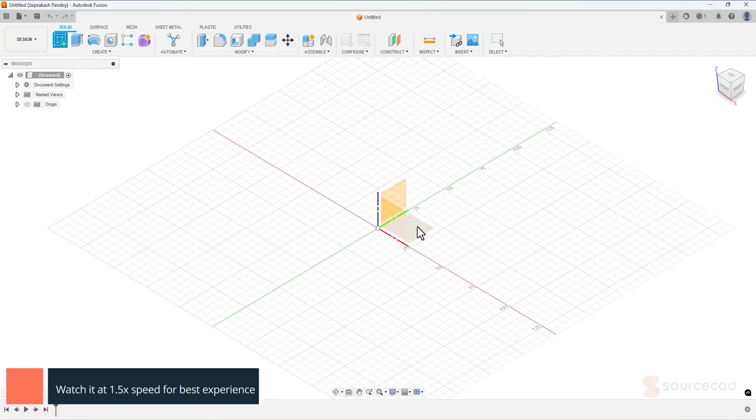Alright, so let's start with the sketch tool. I'm going to start with the top plate on which the holder fixture will rest. So here I have the first circle and the second one.

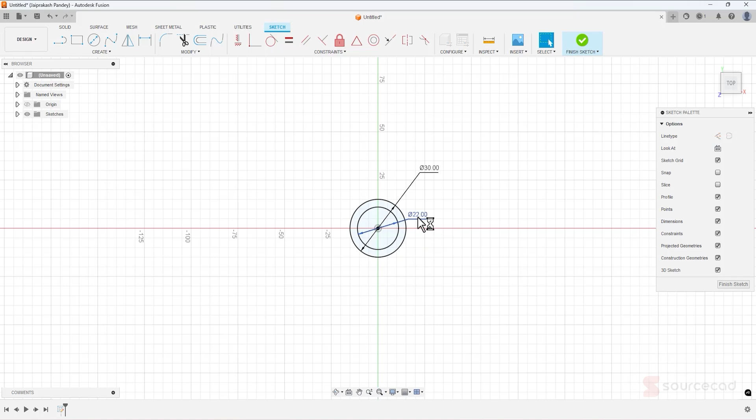Now add the dimension. I'll type D, and here I'll add the dimension of 30, and this one is 22, since we are adding it on the same sketch. So 22 and 30. Now let's extrude this: finish sketch, click on extrude, add this area here, and the distance should be 2 mm. Press enter and we have that plate.

Let's go to sketch again, and this time I'll select the front plane. Or maybe the right plane - so right plane, and now I'll go to spline and we'll add the spline.

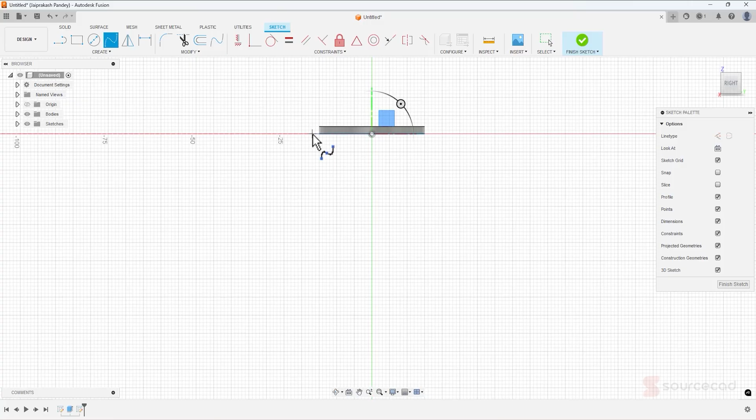I'll start randomly here. I'm not going to be very precise here, but we will constrain it later using dimensions. For now, let's generate the outline of this lamp - a general outline, and I'm going to use at least 4 control points just to ensure the shape can be modified properly afterwards.

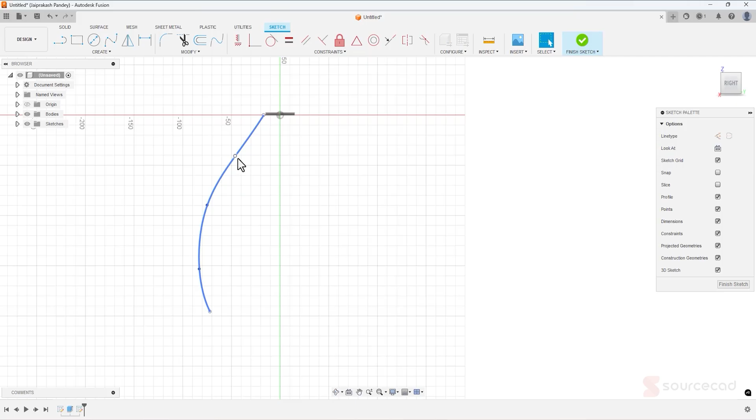So with that completely set, let's just move it slightly here like this. Okay, and this looks about right. All right, here we are - that's the general outline of our lamp.

Now we can constrain this point. So let's type D. From this point to this, I'm going to add the distance of 15, because the entire diameter was 30, so obviously this should be 15.

Now let's go to offset, and I'll offset this spline in this direction. I don't want to make it very thick because we want the light to pass through this material, so we'll just ensure the diameter is just 1 mm, and I'll add the negative side just to ensure it's made on this side of the drawing.

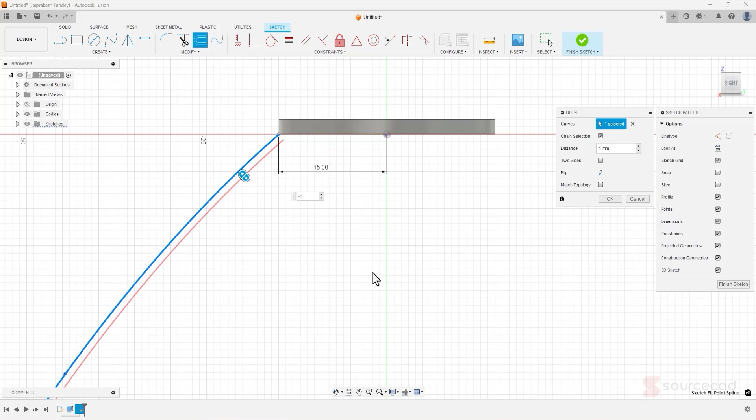Now we need to merge it here, and as this is an offset, we cannot just use it directly. So rather than using it directly, I can use line or maybe spline - I'll just use line to keep the shape simple. So here, and then I'll just connect it with this. Okay, there we are - now this is completely closed, and I'm going to do the same thing for the other side here.

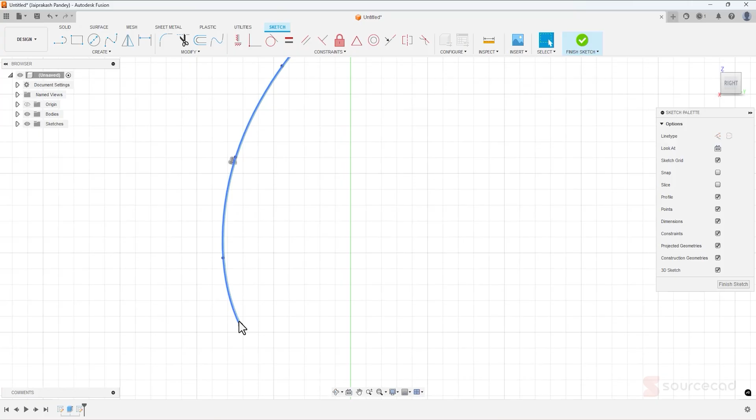So I'll select line and I'll just make it like this here. So this is also done. Now we have a completely closed shape.

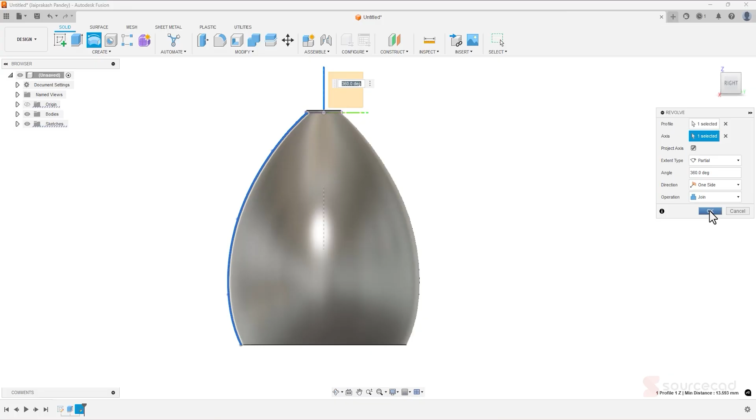We can revolve it, so let's try that. Finish the sketch, go to revolve - the shape is already selected. For the axis, I'll select this axis right here. And here's the shape - select join just to join the top plate with this part, and click OK. And we have this first outline generated properly.

Now before we add details, I do want to ensure that this part remains sturdy enough to hold the entire weight of this lamp, and to do that, maybe I'll just add fillets here. As you can see, this is exactly at the corner, which is not the best place to be, so let's just make a slight modification here.

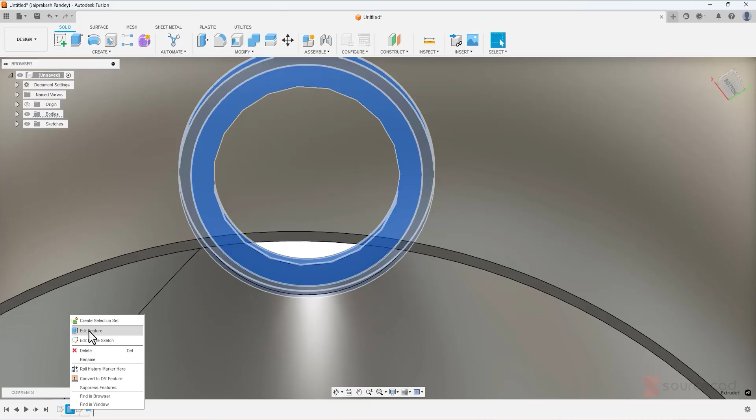I'll go to the original extrude feature and edit this. Rather than adding 2 mm, I'll add minus 2 mm distance - this is going to only reverse the direction. And with that, we now have this shape which is completely merging here.

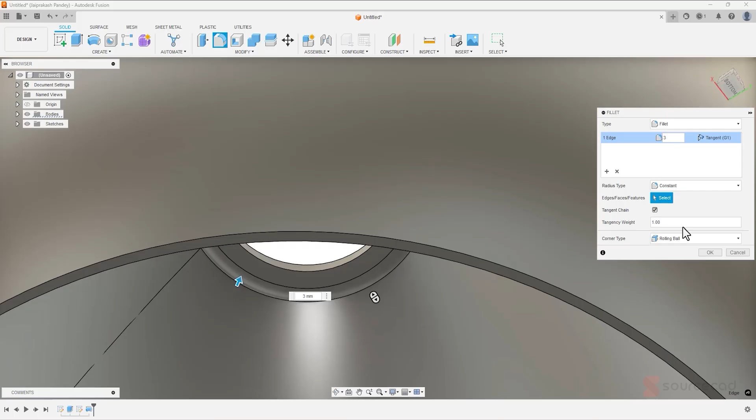Now we don't have that gap, we can add a fillet. So let's go to fillet and add this one, and let's try a fillet of, I guess, 3 or 4 mm is just about right - let's type maybe 3 mm. Just click OK, and we have it added. Now if I orbit this, it looks perfect. Okay, so we have that shape done.

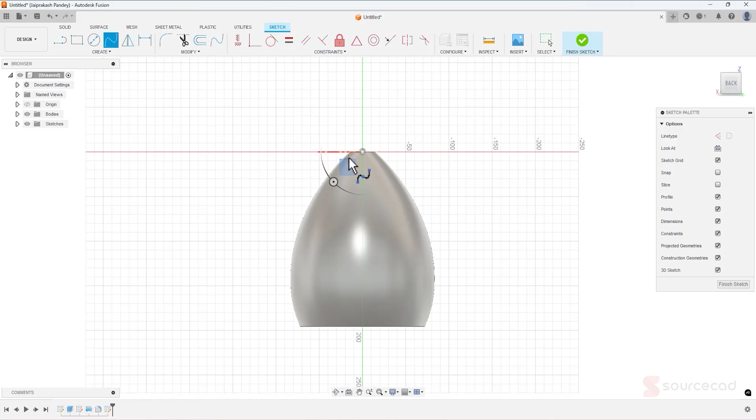Let's add the design features at the top. So let's select back, sketch, here's the plane, and we are ready to add the design features. Once again, spline is the tool we'll use for this - I'll go to spline and let's start about here.

Okay, that's about right. And here I'll just move it up a little, and down here and here, and finally somewhere around here it should finish. Just click OK and we are done.

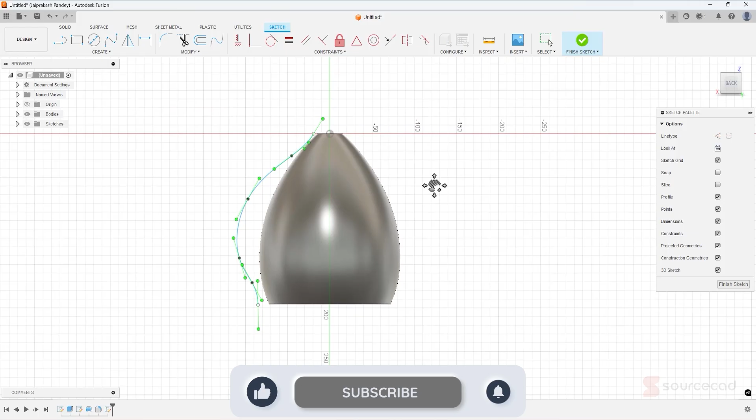Okay, let's modify its shape as well. Now based on the shape, the light will pass through this lamp - so the higher the density, the smaller will be the intensity of the light.

So here, maybe rather than doing it like this, I'll just ensure that it is added like this. So at this area where we have this higher density, less light will pass through, and then here more light will pass. Okay, so once again, just a general shape, and now let's trace this as well, this outline.

To do that, I'll go to create, project, and project this shape here. All right, click OK and we are done. Now to extract this edge, I'll go to create, project include, and I'll select this spun profile. That's going to extract the profile of this lamp.

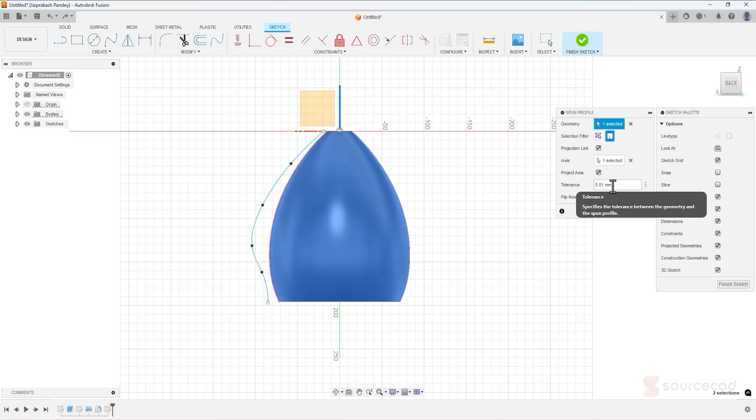So select the lamp, and here in the axis, I'll just select this axis right about here. Add a little bit of tolerance. In this case, I'm just using the default tolerance value, and click OK. And here it is. The profile is extracted.

So with that, let's now constrain it. So I'll just move it like this, add a line connecting this with this, and I'll make sure that this line is horizontal. Okay, done. What next? Well, we just need to do the same thing about here. So let's go to line, select this and this. All right, so we are done. This is already horizontal, so we don't need to make any modification here.

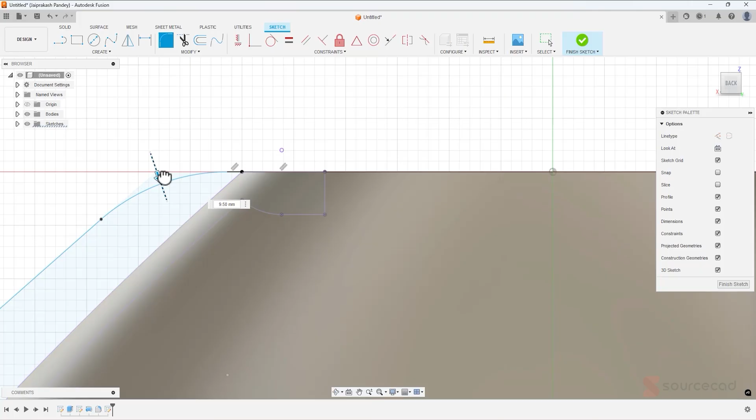The only thing that you may want to do is add a little bit of fillet just to make sure that this remains smooth. We can do it right about here. So I'll go to fillet, select this edge, move it inside, and this seems just good enough. So I'll press enter, and yeah, there we are.

Now if you want to add a fillet maybe on this side, that's also fine, but I'll leave it like this. Or maybe add a fillet here for a very small edge. Yeah, that just looks about good. So yeah, that's good. Okay, so that's done.

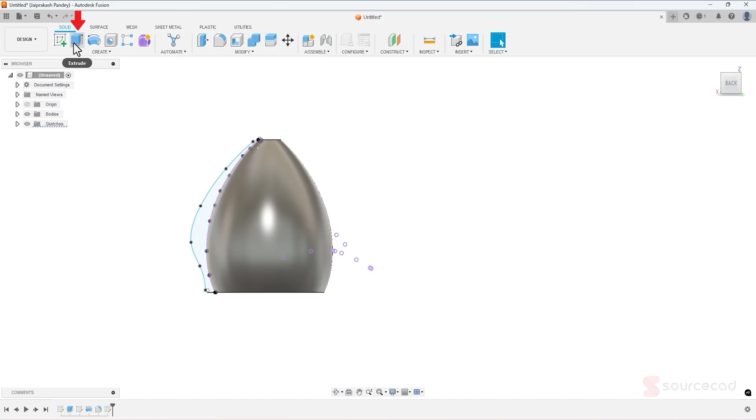Now finish the sketch and extrude this feature. So I'll just select this, and the extruded length is 1 unit. Now the current feature selected is cut. I'll just make sure that this is new body because we want to make multiple copies of this new body. So well, that's how it should be. And in fact, you know what, it should be 2 mm. So 2 and click OK, and we have this shape here.

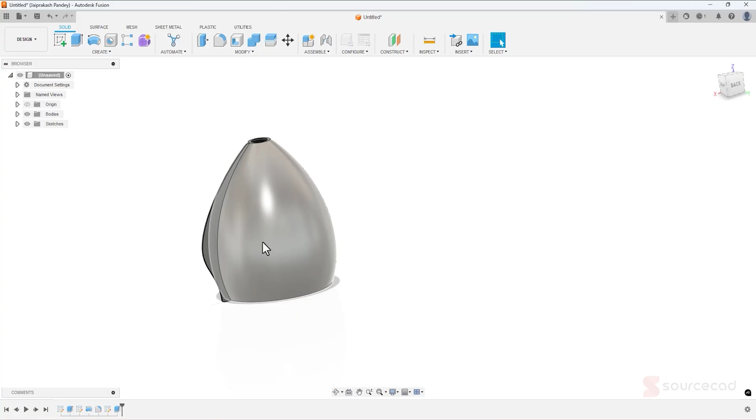Now we need to make multiple patterns of this. To make the pattern, go to create, pattern, and circular pattern. Now select this fin, select the axis, and select this axis right about here. And here it is. Now by default it's adding 32 objects, but I think we can do it better. Maybe add 48 just to add more density to this, and click OK.

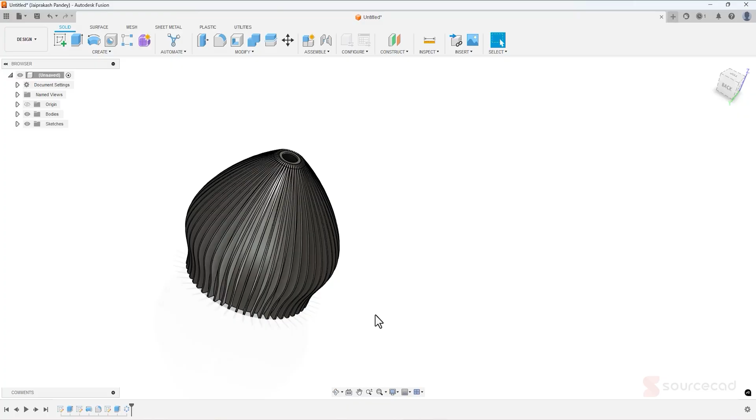And here we are. Here is the general outline complete. So that's the interior, and these are the fins that we've added. Now the lamp is ready, and we can directly go and just 3D print it. But if you want to add more features, you're welcome to do that as well. In this case, I'll just save it first, and I'll call it lamp.

All right. And now let's go to utilities and see how much material it's going to consume and how long it's going to take to 3D print this. Now in this manufacturing section, we have a problem. Well, if I select print utility, and if I select an object, you'll notice that everything is separate. So we just need to combine it all into one before we can actually send it to our 3D printer.

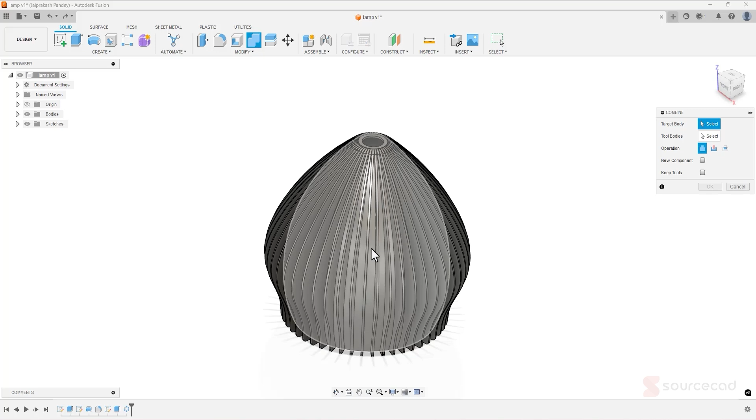So let's cancel it out, and I'll go to solid, and I'll select this combine feature. Now I'll start with the base shape, which is this lamp. And then for the tool bodies, I'll expand this body section, and I'll select these entire set of bodies, and we have a problem. So seemingly the problem is showing up because there are some gaps in our model. So let's just cancel it and just figure out where the gaps are.

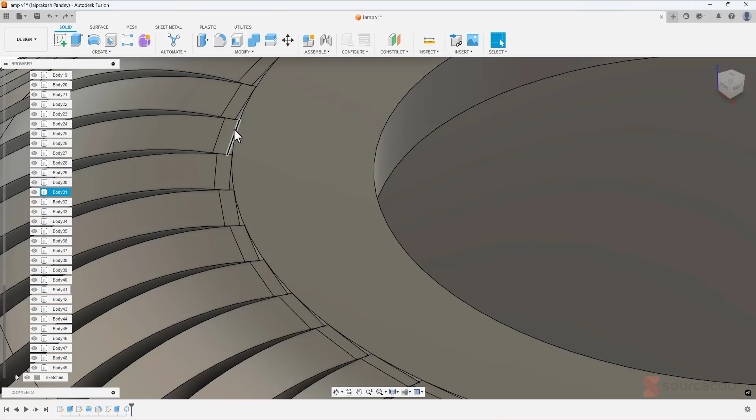And as you can see, yes, we do have gaps. So these features are not exactly overlapping here, and they're also overlapping with one another. So rather than using 48, maybe I'll use a slightly smaller number here. So I'll go to this feature and edit circular pattern, and rather than using 48, I'll use 42 features. So this overlap problem is fixed, but still we have a gap here.

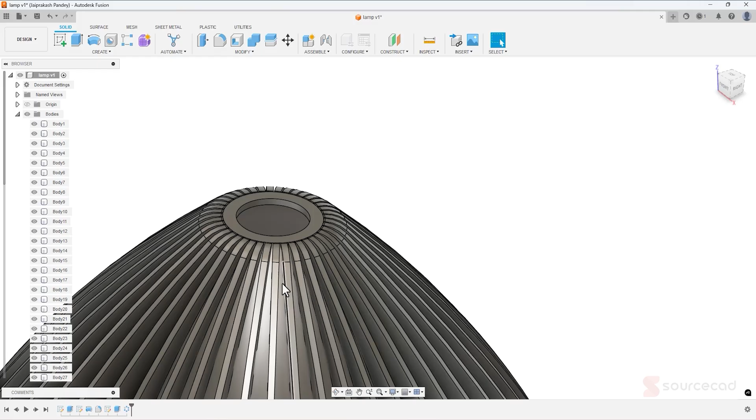Now to fix this gap, I'm going to offset the face. So I'll just make it more thick, this lamp face. So go to modify and select offset face. Now the face that we are going to offset is this lamp right about here.

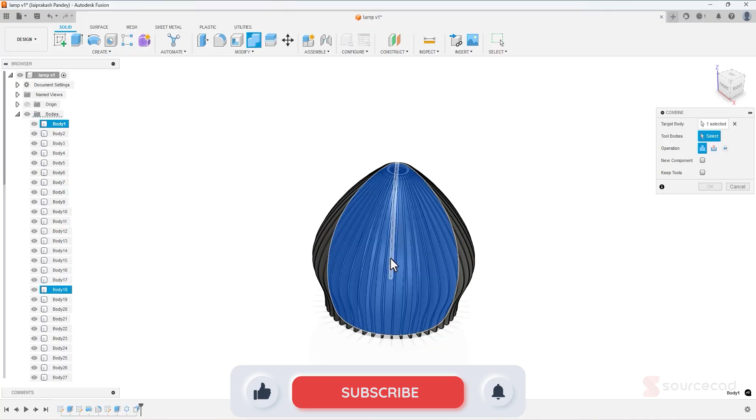And the offset distance is 0.2. I'm not going to offset it too much. So 0.2 and OK. And let's just see if this fixes the issue. So combine, select the main feature. And now for the tool bodies, select this, scroll, shift, and then click this. So press and hold shift and then click on the last body.

And yes, that seems to have fixed the issue. Click OK. And we are done. Now everything is combined into one single body. That's the lamp body. And we are now ready to 3D print it. So let's go to Utilities, Make, and here select Print Utility.

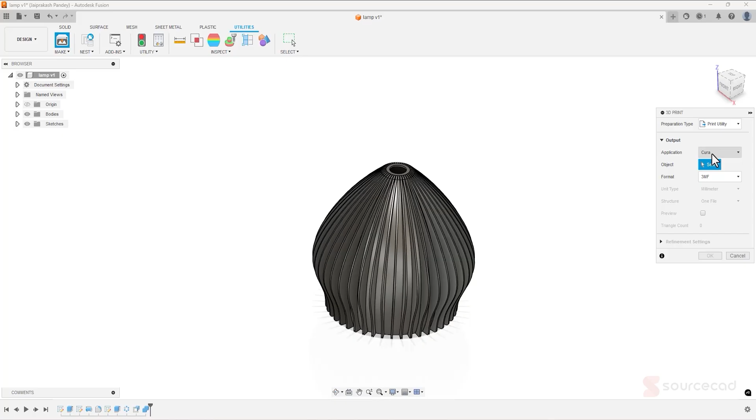Now I'm using Cura, so I'll leave it here as Cura. Then select the main feature, and in the format, I'll select STL. Unit type millimeter. And if you want to see the preview, you can check this box. And here's the mesh that it created. All right, let's just uncheck it. Click OK. And with the default refinement settings, I'm going to export the STL file.

Now, if you have Cura or other slicer software installed, it will automatically launch it just like this. And in my case, it automatically showed this lamp as well. So let's just select it and I'll go to move and I'll just move it inside this build volume. So let's just select it and move it inside. Okay, now this lamp is almost taking up the entire space of my 3D printer. So making it slightly smaller is a good idea, I think.

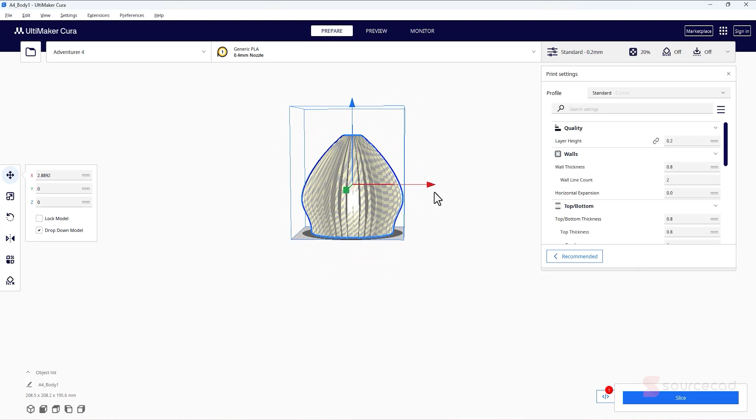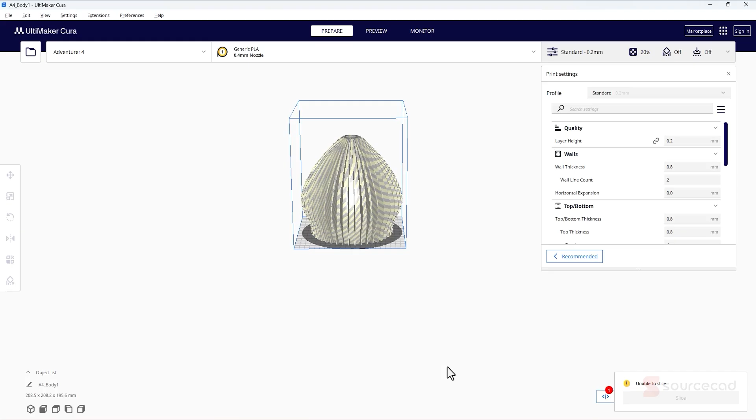But before I do that, maybe let's just move it slightly to the left. All right. And with the default quality, we can print it. But the current quality is actually very fine. And with that, it's going to take, well, at least a few days. So I'll go to slice. And yes, it's not able to slice because it's outside the build volume. So we need to decrease its overall size.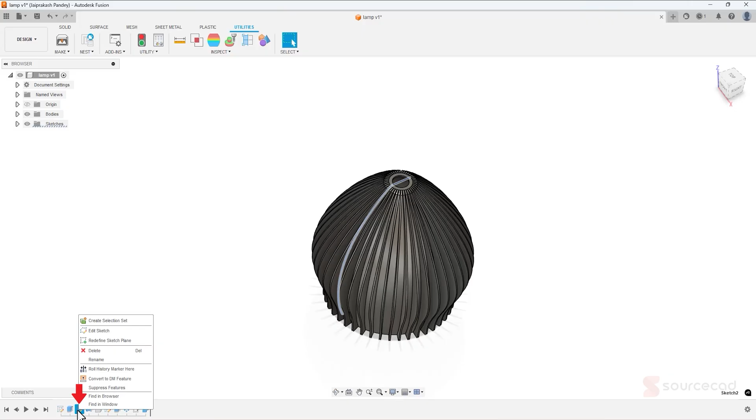Now, decreasing its overall size here is not a good idea. The reason is, of course, because it's going to change the size of this opening here as well. So we'll do it directly in Fusion. So let's go to this and let's go to the sketch feature. This first sketch feature that we created. So edit sketch and let's just move it slightly inside like that.

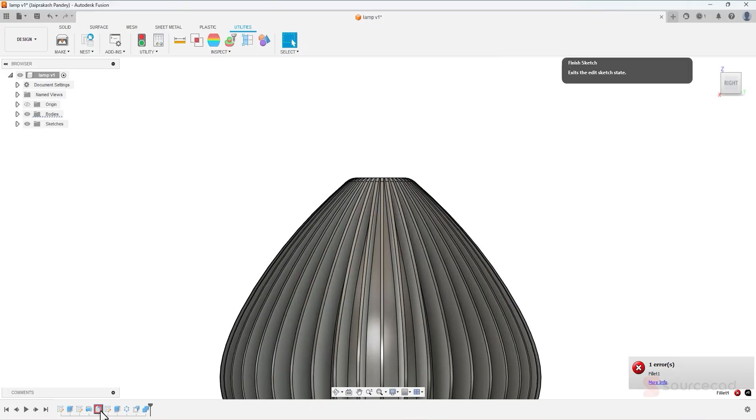Okay, here we are. Now what about this? Well, here, the overall shape looks good. So yeah, I'll leave it as it is. Finish the sketch. There seems to be an error, so I'll just select the fillet and I'll delete it. We'll just add this fillet later.

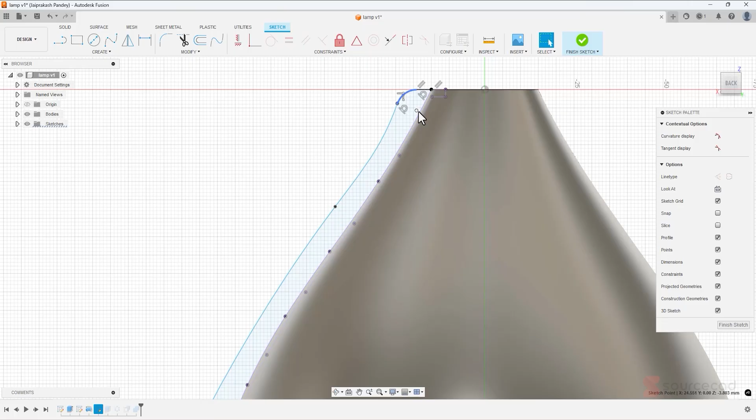Now these fin shapes, I think we should modify this as well. So let's go to this sketch and edit this. So here, let's just move it like that. Here, of course, I'll just move it in, and this as well. This one, of course. And here it really looks terrible because of the fillet. So let's just get rid of this fillet entirely. All right. And then let's fix it.

Okay. So after fixing the general shape of this lamp, yeah, that seems about right. Okay. Let's just finish the sketch. And here we are. We have the lamp. Now let's try and export this thing. Now, of course, we forgot that fillet which we added inside. So after doing these modifications, we can add the fillet.

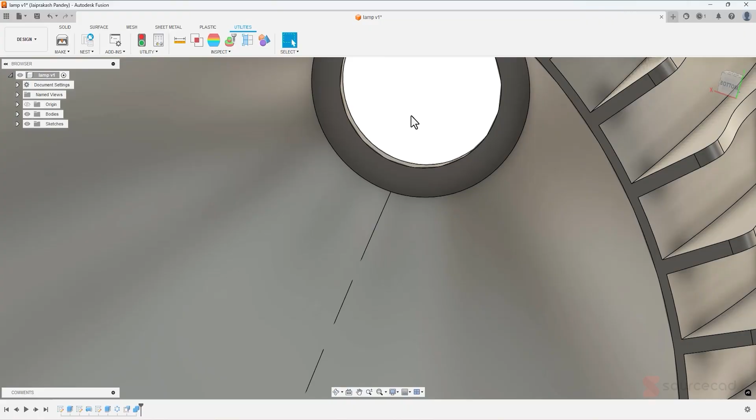And because we are 3D printing it, adding a chamfer will make more sense rather than adding a fillet. So let's just add a chamfer. And I think a 2mm chamfer is just fine for this case. So 2mm chamfer, and here. Let's save it. Utilities, 3D print. Well, everything is exactly the same. Select the part and okay.

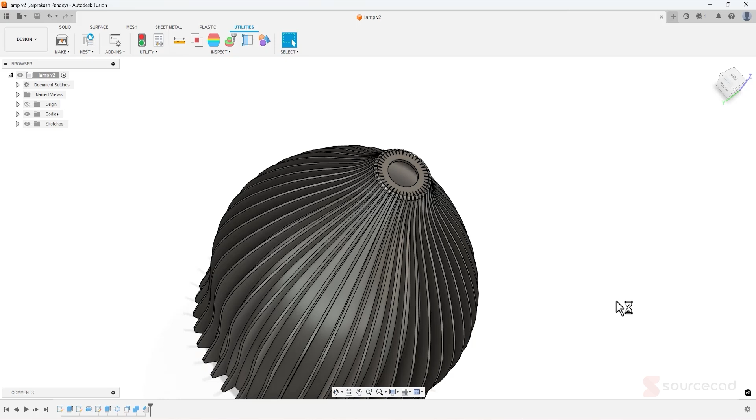Okay, and this fits entirely inside the build space, or so it seems. So here also we seem to have an error. Let's just slice it with the default settings and see if it's going to slice it properly or not. Yes, it is, and it's going to take 1 day, 1 hour, 41 minutes, which is, well, too much. So let's just make a few adjustments here.

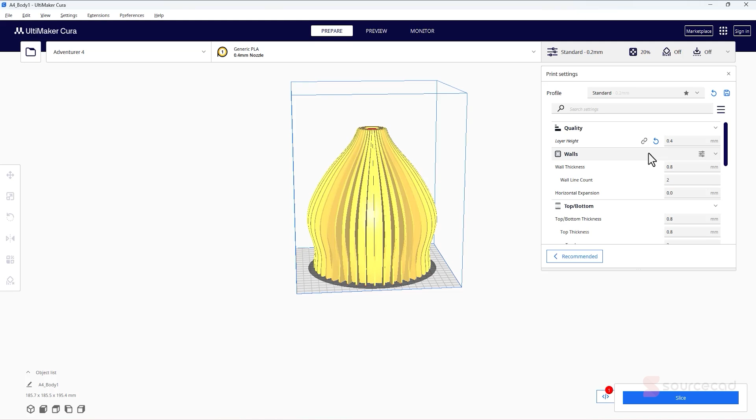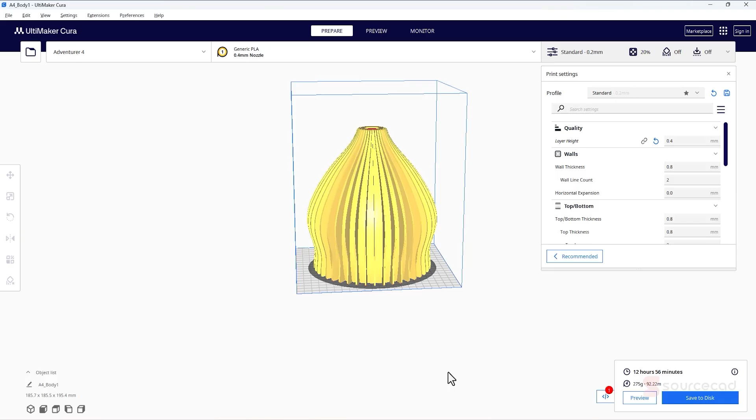The first adjustment is the layer height. I'll just change that to 0.4. I don't want an ultra fine setting here, and that's going to drastically change the 3D print time. So click on slice, and now it's almost half, 12 hours 56 minutes, which is just about right. So I'll just use this file now. So save to disk, desktop, and here let's just save it, lamp 3D print. Okay, our file is saved, and now it's off to the 3D printer.

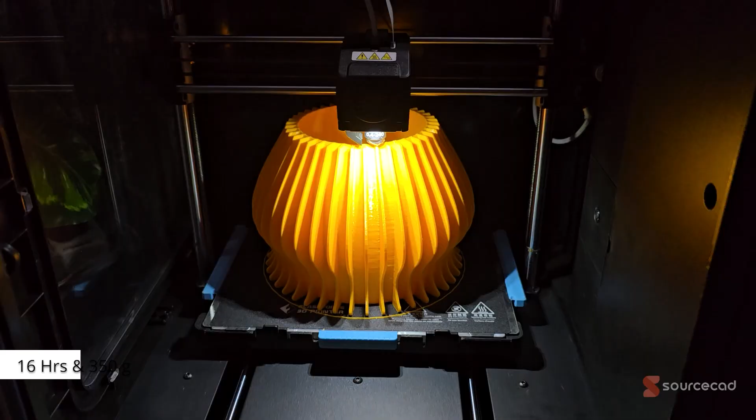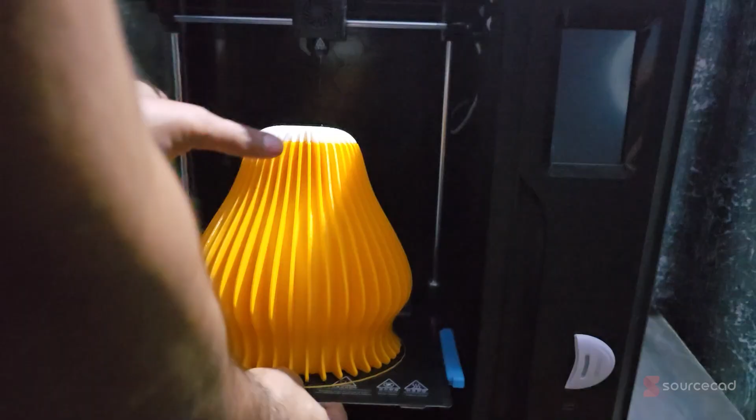Now, after setting up my Adventurer 4 3D printer with default settings and PLA as the material, I started the print. Now, it took slightly more than 16 hours and about 350 grams of PLA to make this entire lamp. And I also ran out of PLA when close to about the 90% mark. So, when 90% of the lamp was finished, I changed the material and added this white spool of filament, which now looks even more impressive. And finally, here is the lamp with bulb as well.